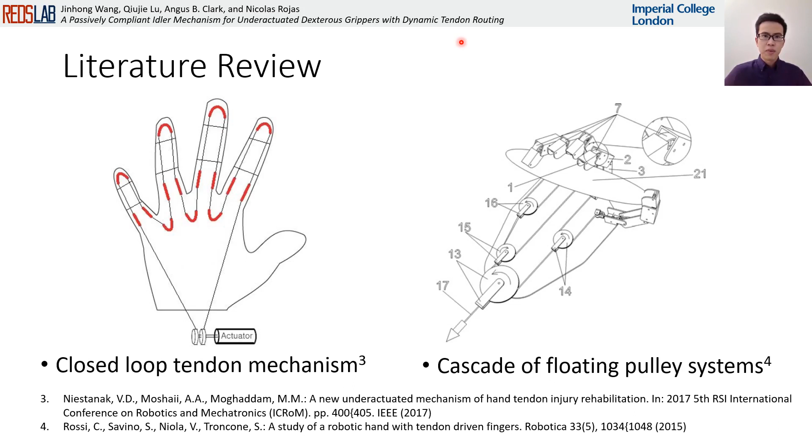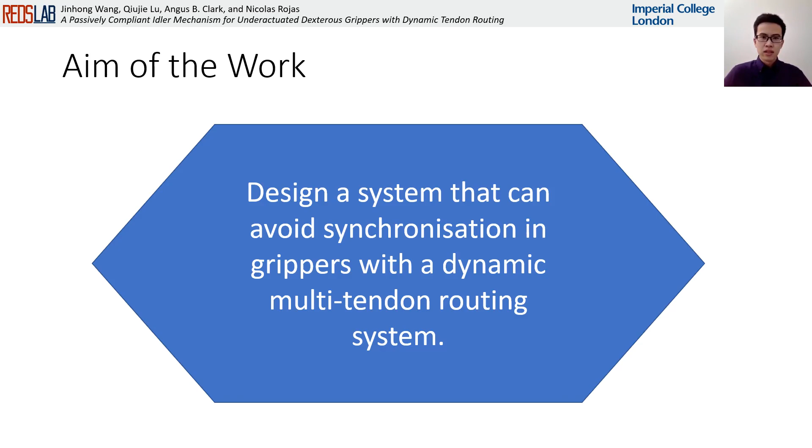Therefore, our aim is to provide a solution that allows a gripper with single-input, multi-output tendon systems to perform dexterous manipulation, while avoiding the unsynchronization of the tendon caused by the manipulation. Therefore, we came up with a novel idler system to achieve this aim.

Idlers, or tensioners, were usually used in flexible mechanical transmissions such as belt or chain drive systems. Their main purpose is to increase the wrap angle on the driving pulley or sprocket so that force transfer capability can be maximized. To ensure the performance of the transmission, the belts or chains must be kept in tension during operation, and the same concept applies to the design of tendon routing systems.

When a tendon is routed, the total length is fixed. For robotic hands with reconfigurable palms, it is common for finger positions to change relative to the actuators, which means the fixed tendon length will either become too long or too short for the same finger posture. Hence, the fingers might lose contact with the grasped object.

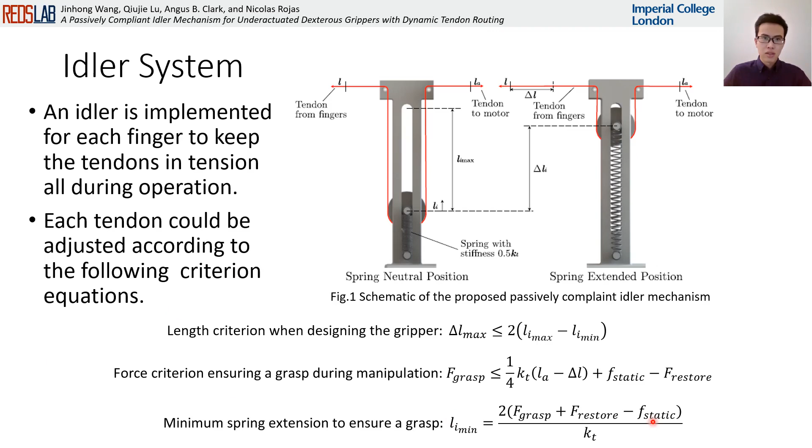In order to show the performance of the idler system, it is implemented on a reconfigurable palm based on a 5-bar linkage with 3 underactuated fingers located at its moving joints. Therefore, when reconfiguring the 5-bar linkage, which is the gripper's palm, the fingers will move relative to the base where the tendon actuator is mounted.

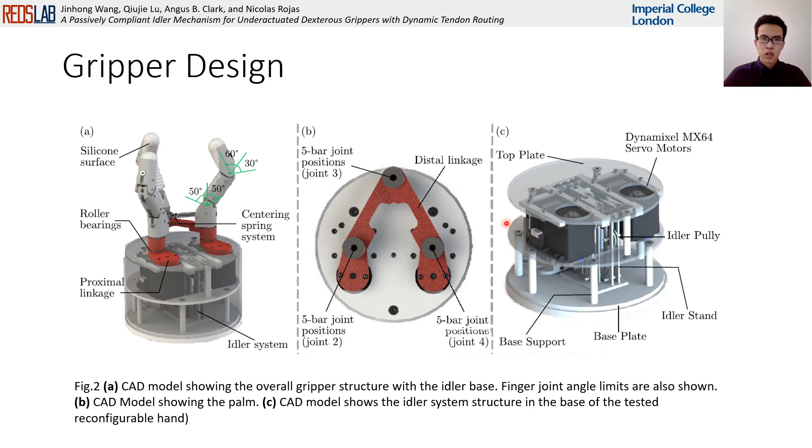The length of the tendons will hence need to be adjusted in order to maintain the grasping forces. In addition, the tendon length change of each finger is different from the others, which provides more problems for actuation. The idler system was hence incorporated with the gripper to make tendon actuation possible with only a single motor.

As shown on the figure, the idler supports were integrated with the bases to increase the strength of the support. The full height of the base was utilized to maximize the potential tendon actuation length. Dowel pins and pulleys were utilized to reduce friction, and the tendons were routed near the top plate without hindering the adjacent idlers and spring.

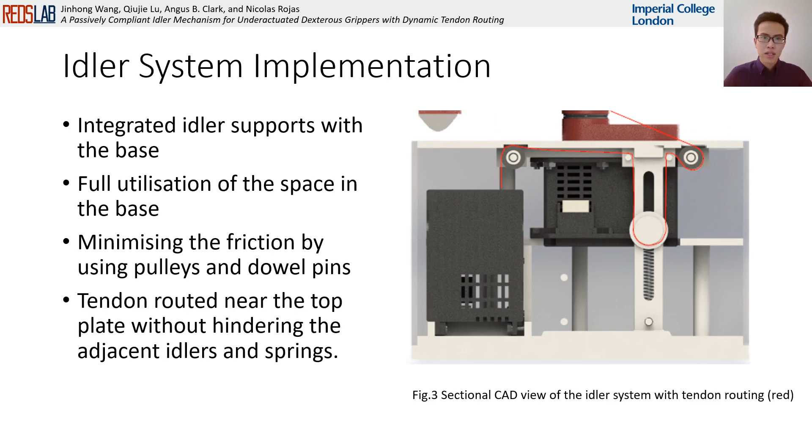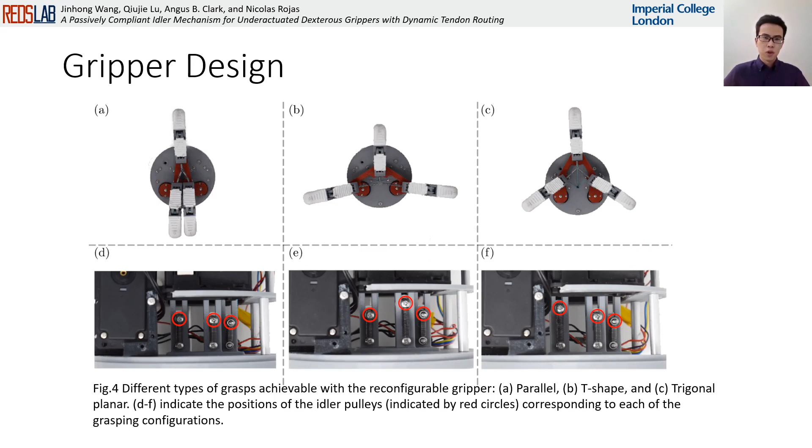It's clear that during manipulation, the gripper with the idlers could keep the grasping forces and maintain them at a sufficient level. In contrast, the other gripper failed to perform a grasping posture, showing a large fluctuation in the finger positions.

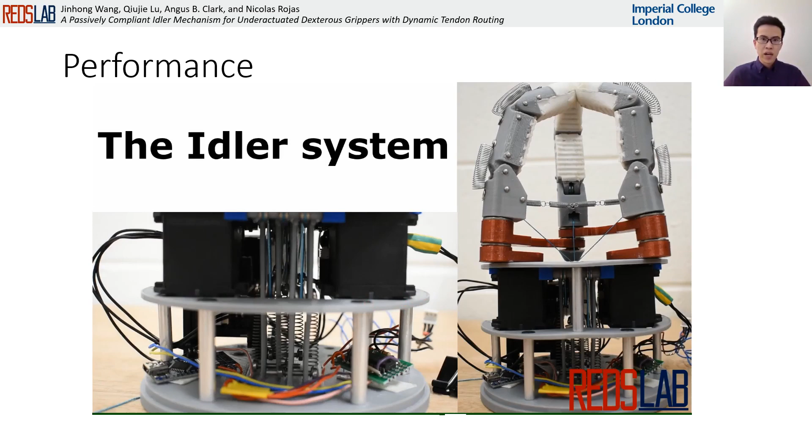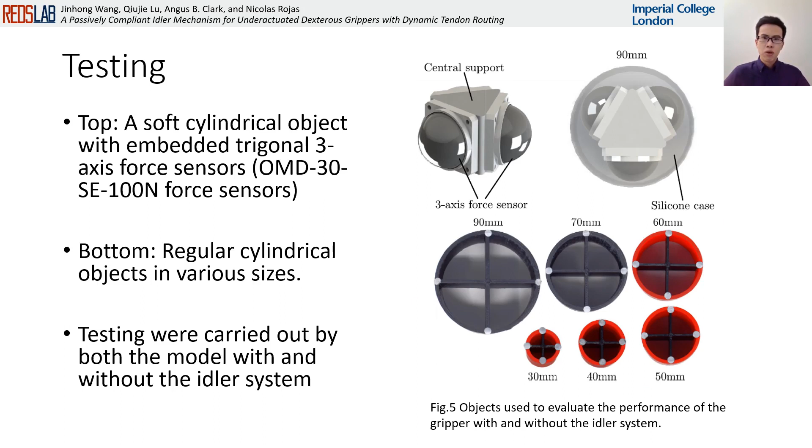In addition, testing objects with a variety of sizes were employed to prove that the gripper is capable of in-hand manipulation. Three repetitions were carried out for each set, and one of them will be shown in the following slides.

This slide shows the comparison between two grippers. Both the translational and rotational trajectories were performed.

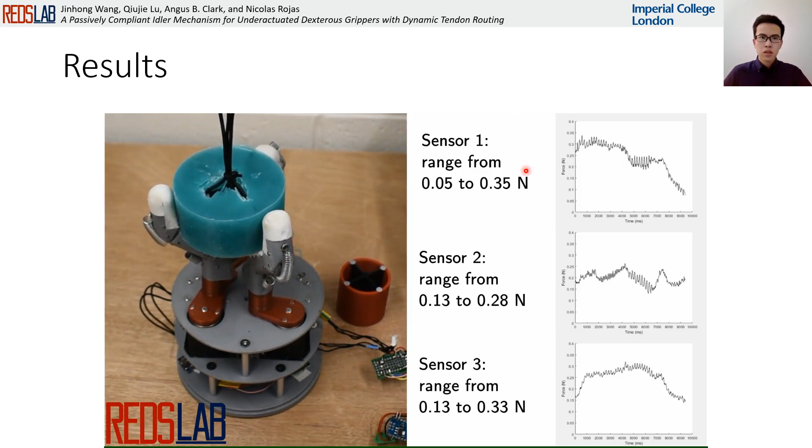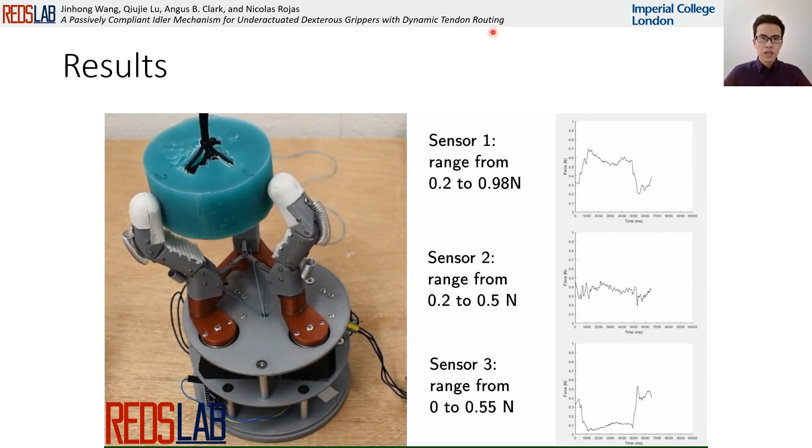From the data of both trajectories, it is obvious that the gripper with the idler system is able to maintain a higher average grasping force during manipulation than the gripper with tendons directly connected to the actuator. In addition, during the experiments for the comparison group, we found that without the idler system, the gripper is impossible to grasp the object with different grasping configurations, let alone perform in-hand manipulation.

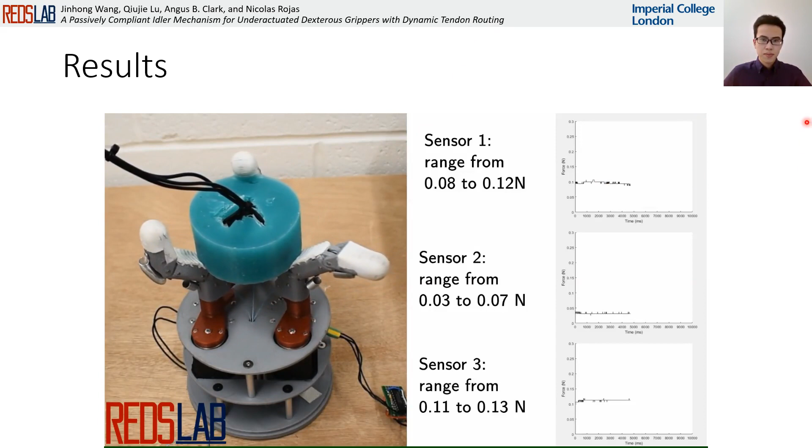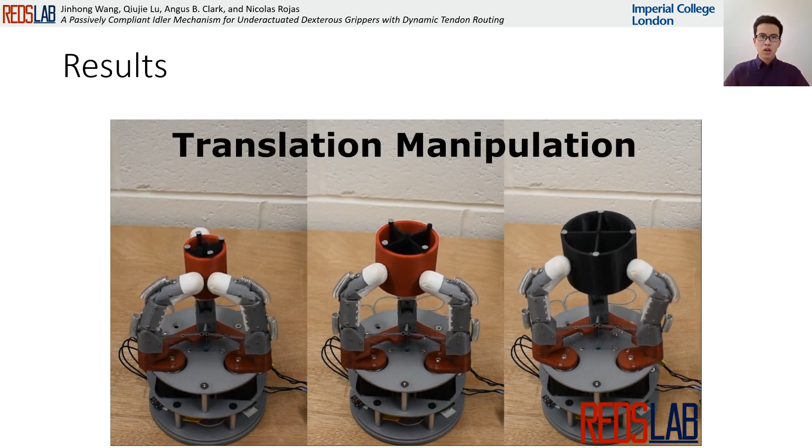Apart from the force testing, the grasping and manipulation capability is also examined with objects of different sizes. Two modes of manipulation were shown, and it is clear that the idler system is able to maintain the grasping forces at a sufficient level, thus guaranteeing the manipulation.

To sum up, the introduced idler system is capable of maintaining the grasping forces. Although a few readings dropped close to zero, this was due to a change of the contact points on the fingertip during manipulation.

In addition, the experiments showed that a larger tendon length difference will lead to a larger fluctuation in the contact force readings. This is expected based on Hooke's law. The average grasping force, however, is largely dependent on the neutral position of the tendon routing.

Therefore, unlike those grippers in the literature review, the grasping forces of different fingers implemented with idler systems can be adjusted individually by changing the initial length of the tendons routed on, or the spring in the idler system.

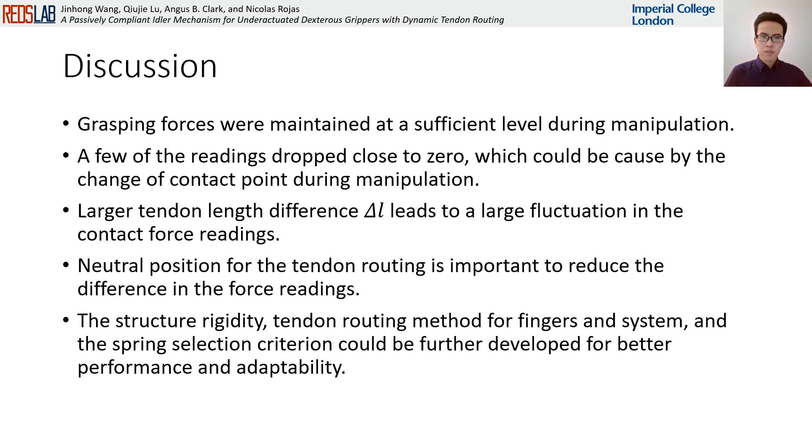As for further improvements, we found that sometimes the bending of the 3D printed materials could undermine the performance of the gripper. In addition, large friction was caused between the tendons and the structure, hence a better tendon routing method could be applied to improve performance.